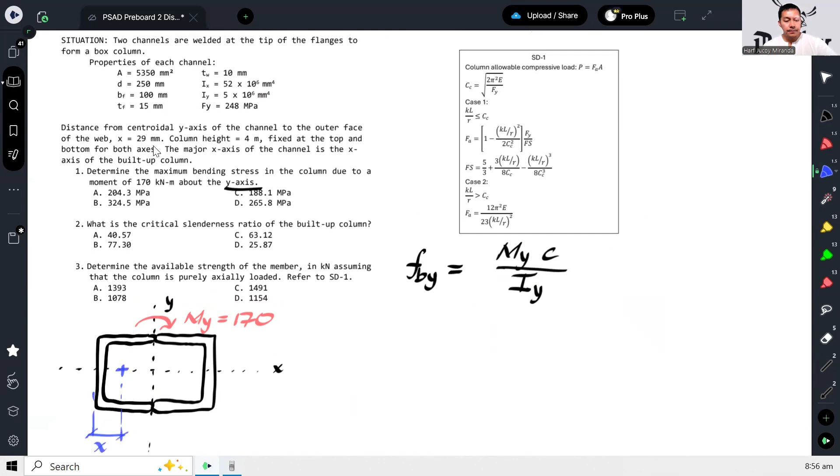All we have to do is transfer that to the new centroid. That length is the flange width minus x. So let's compute the Iy.

Iy would be equal to, since it's symmetrical and the centroid location on the other side is the same, we just multiply this by 2. So the Iy of both channels is the same, plus the area times the distance squared, which is BF minus x, so 100 minus 29, squared. That's how we get our Iy.

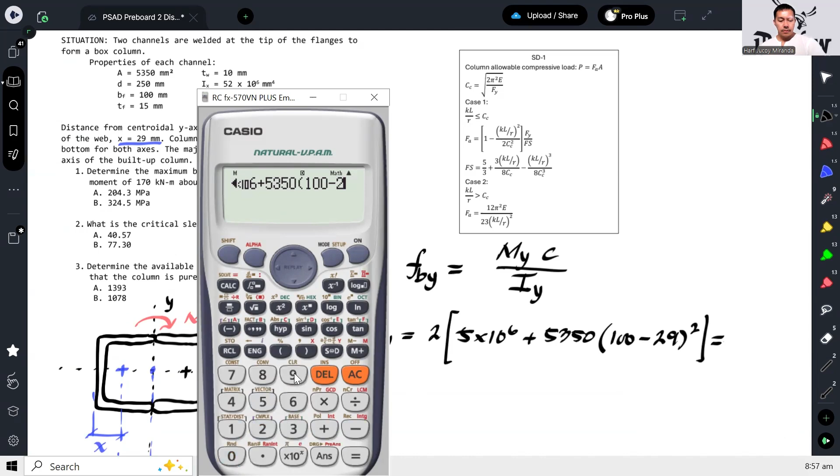That gives us 63.9387. Let's store that.

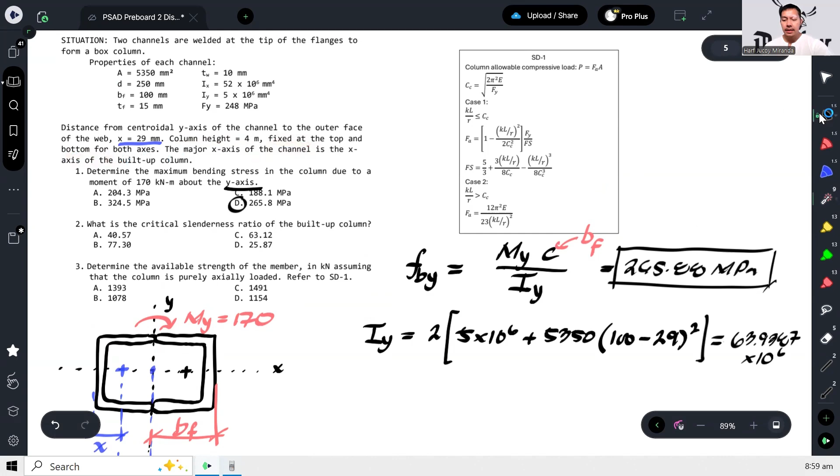Let's double check the givens: column height, fixed at the top and at the bottom. So it looks like this.

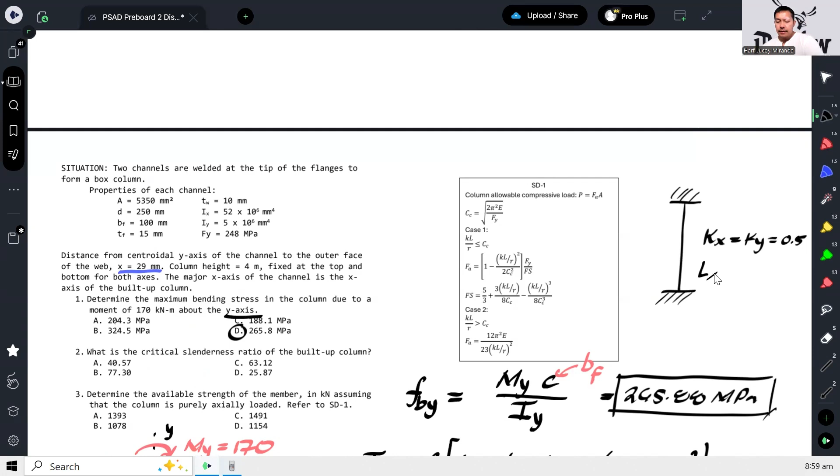There's no mention of bracing on the minor axis, so it's safe to say that in both axes, our K is the same. When both ends are fixed, K is 0.5. Our L is also the same for both, which is 4,000.

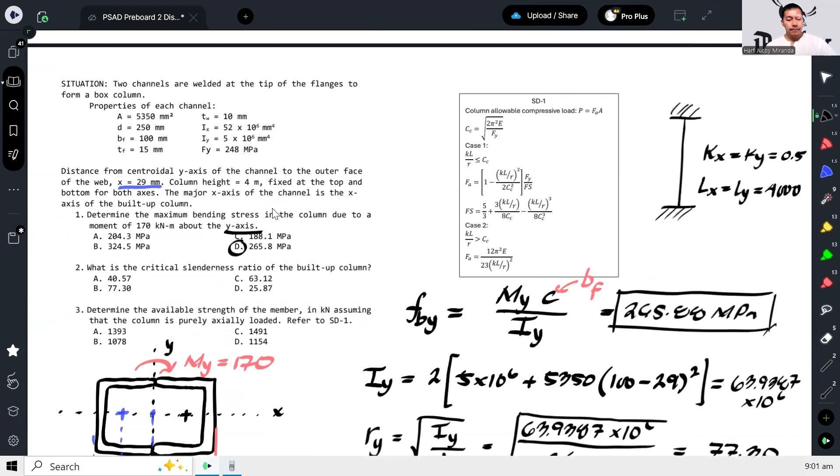And that gives us 104 times 10 to the 6.

Now, by comparison, we can immediately see that Ix is much larger than Iy. So it will follow that Rx, whatever this may be, is larger than Ry. And since they have the same effective length factor and length, it will follow that the smaller R gives us the governing slenderness ratio, because that gives us the larger slenderness ratio.

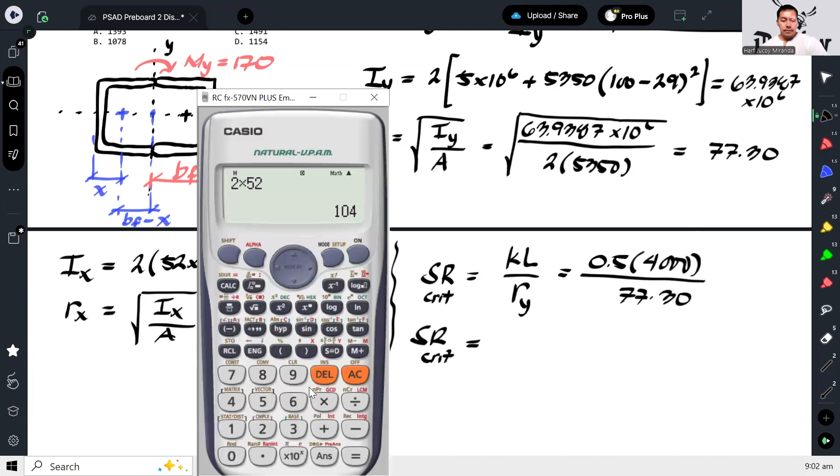So therefore, we have 0.5 times 4,000 over 77.3. So our critical slenderness ratio gives us 25.87.

Okay, and that is letter D.

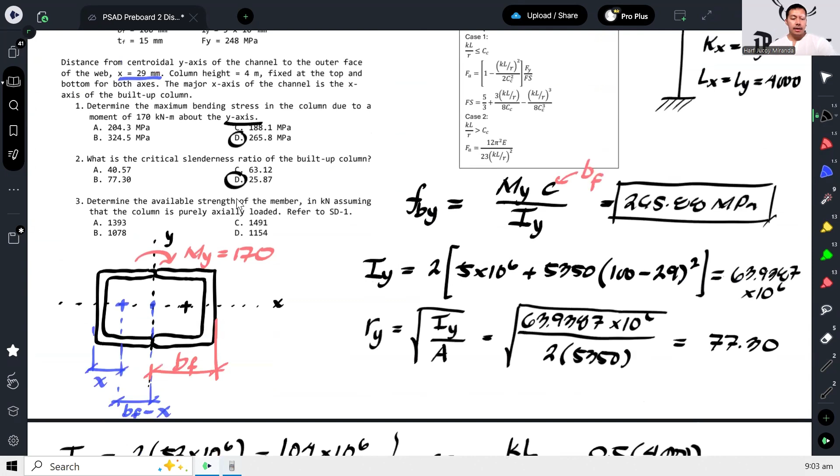Number 3, determine the available strength of the member in kilonewtons assuming the column is purely axially loaded. Refer to SD1. So here we are asked to use NSCP 2001.

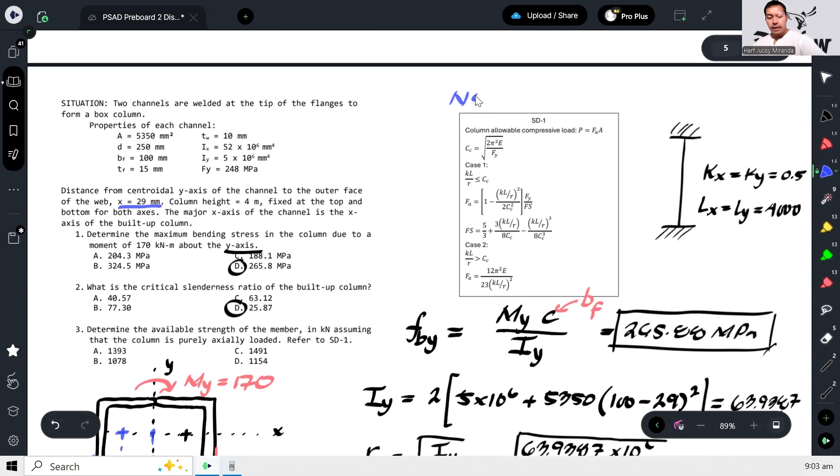Okay, anyway, like I said, in the board exam it's a mix - there are new codes and old codes. But whether it's the old or new code being used, the code itself is given to us. So all we have to do is follow the code and be familiar with it.

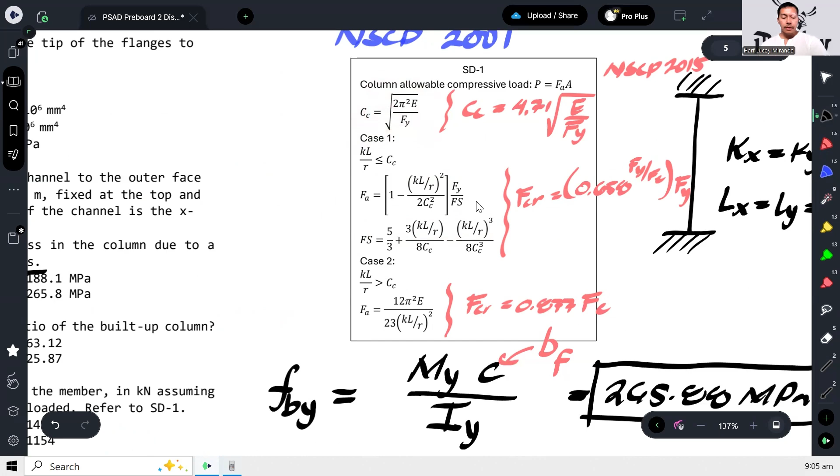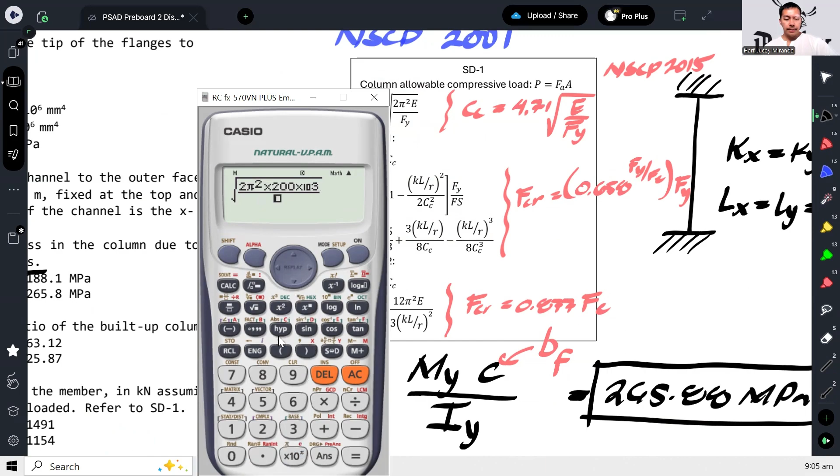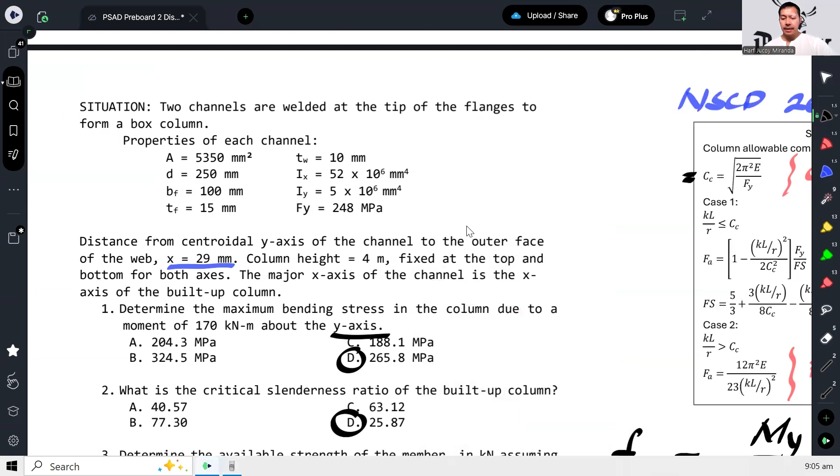So, 126.17. Let's store that.

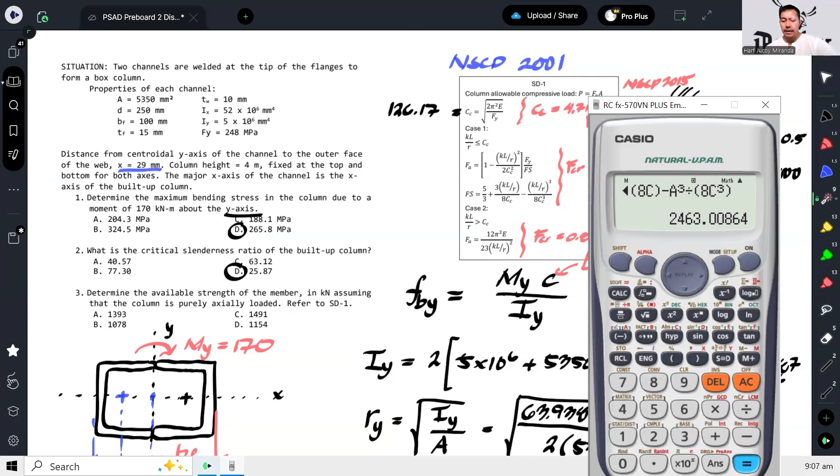There. So that gives us 139.33. That's our FA, the allowable stress.

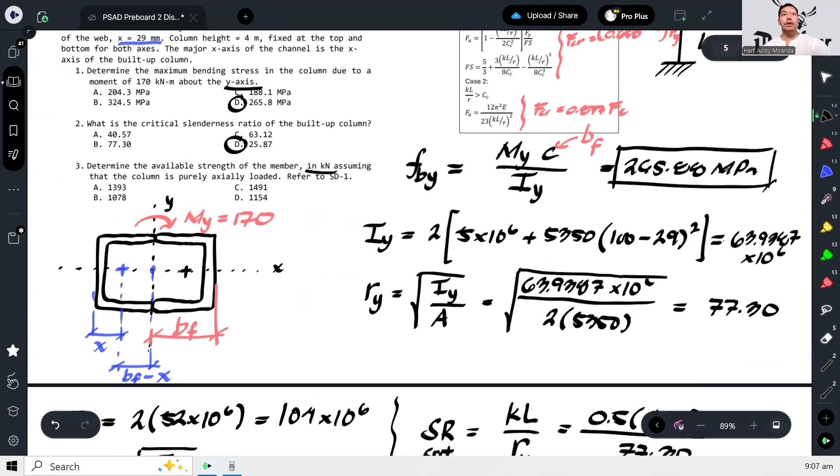Okay, and of course that's not the answer yet. What's being asked is the allowable strength in kilonewtons, so force is what's asked. To compute the force, that's stress times total area.

But again, this total area is 2 times 5,350. What is that? It's because this is a box column, or a built-up section now. So, times 2 times 5,350.

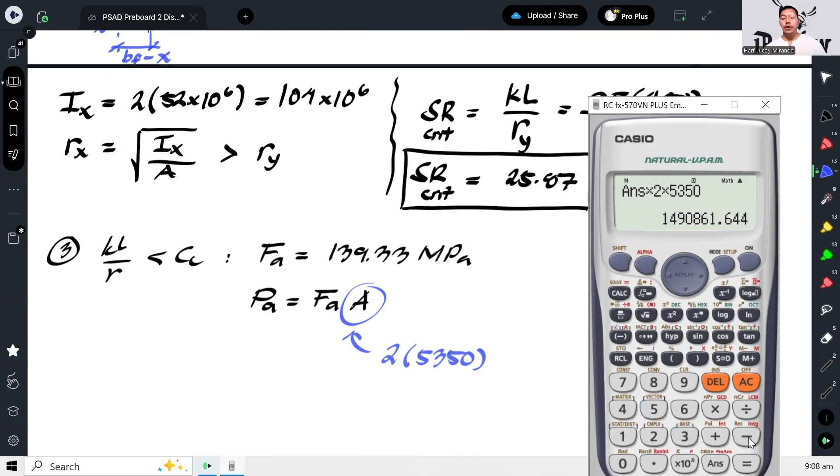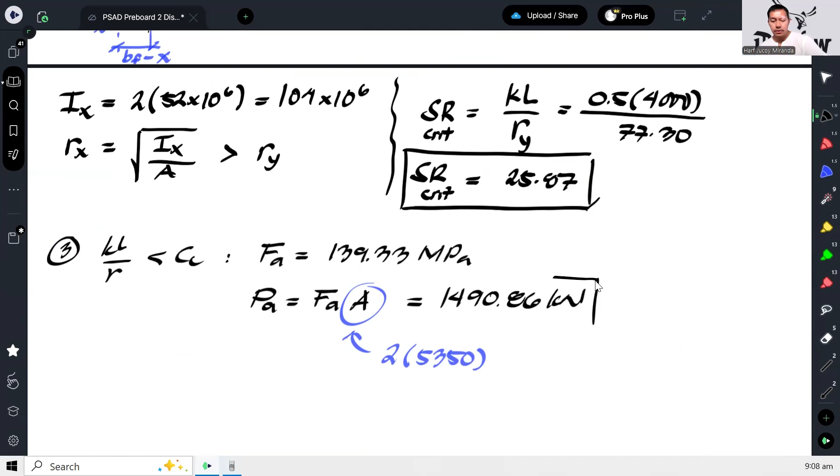But this is in Newtons, so that's a large number. To convert to kilonewtons, just divide by 1,000. So, 1490.86 kilonewtons. And that would be the allowable force.

So, letter C. Okay, and that's how you solve this problem.